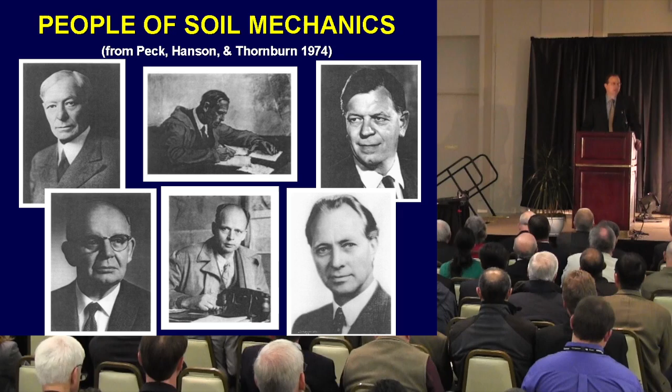So the outline of my talk: I'm going to describe the problem, and then, since the Peck Award mentions primarily the work done in Turkey after the Kocaeli earthquake in 1999, I'm going to go back and reflect on the field observations. I didn't know I was going to do research in this area—it was the earthquake that told me I needed to.

After the field observations, we moved into cyclic testing and centrifuge testing to get better insight, and did some analysis. Unfortunately, we continue to struggle with the challenge of earthquake engineering, and I actually just flew in from New Zealand, where I'm spending my sabbatical, because the centrifuge tests I was modeling at UC Davis are actually happening at full scale multiple times during the Canterbury earthquake sequence. So I'll talk a little about that, and then be bold enough to finish with some recommendations.

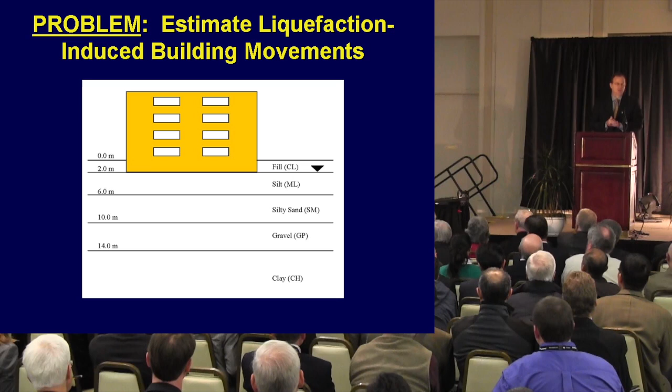The problem can be simply stated: all you have to do is estimate liquefaction-induced building movements.

What most people do is apply the techniques that are available. What's largely available are methods for estimating free field settlement of level ground. Many of these are based on the great laboratory testing of clean sands by Ishihara and Yoshimine in 1992.

In this simple case, you could calculate the factor of safety against triggering of liquefaction and estimate the relative density. Then each layer would have a volumetric strain; multiply it by the thickness of that layer, sum that up, and you can estimate your settlement.

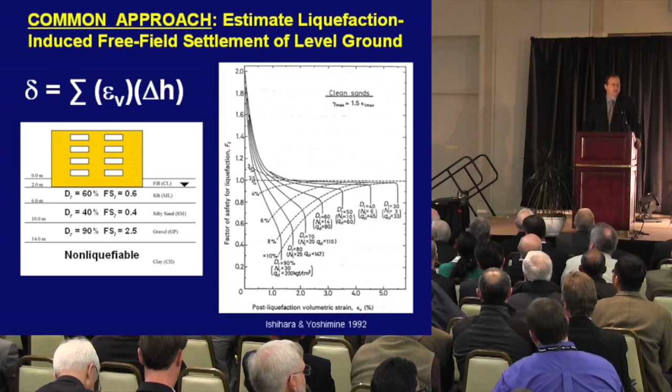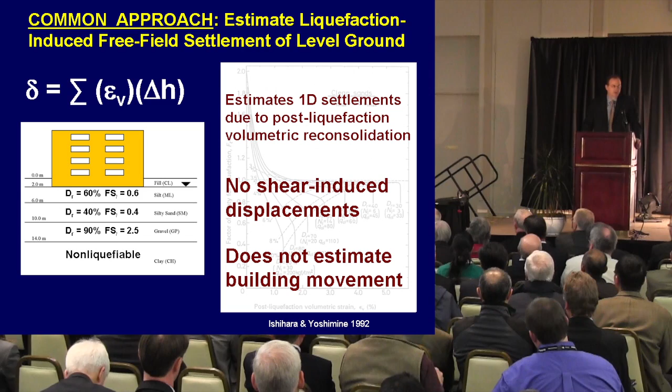Unfortunately, this is due to post-liquefaction volumetric reconsolidation. So it's good for the free field where that mechanism holds. There's no shear-induced displacements. It does not estimate building movements where the building is imposing shear in the liquefied material.

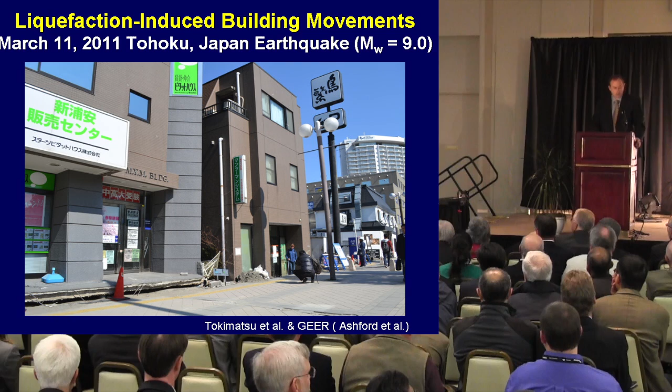There's been great work on this by Professor Tokimatsu, Professor Dobry, and others, looking at case histories and some centrifuge tests with thick deposits. These case histories always had thick deposits of sand, and so they developed this normalization, such as settlement of the building normalized by the liquefied layer thickness. That normalization suggests it's volumetric strain — if you double the thickness of the liquefiable layer, you double the settlement.

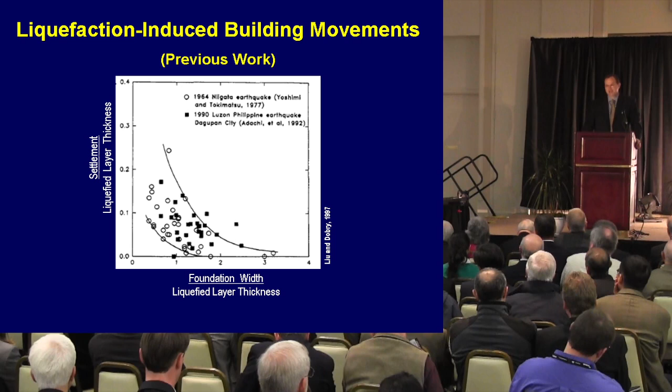That's not true when you have thin layers and you have shear-based movement. I'll show you that later.

Liquefaction has occurred for many years and centuries. We have the 1906 earthquake, and no one forgets their first sand boil. In fact, Ross Boulanger and I were out there on the approach to I-880 after the Loma Prieta earthquake, and that's my first sand boil that I've ever seen.

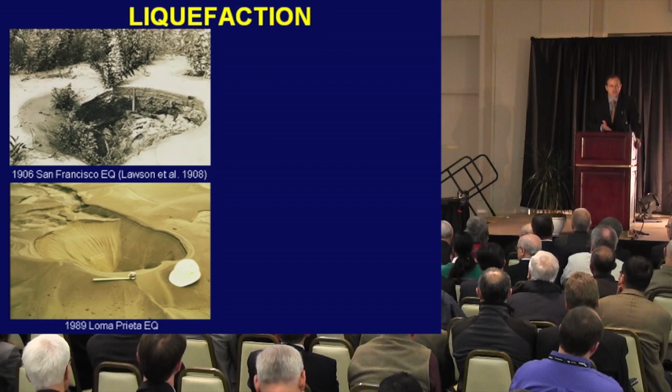That's the obvious consequence that we've had liquefaction — sand boils, injecta. Part of the controversy is liquefaction triggering, whether you call it cyclic mobility, cyclic softening, cyclic failure, liquefaction, or flow liquefaction. I think we can jump past some of those controversies if we focus on effects of liquefaction.

Because in a sense, there's a material beneath the building that has undergone some kind of transformation, and it has a stress-strain response, and there's a strain deformation field, and then the buildings tip over or a bridge undergoes a lateral spread.

In fact, I can show you a lot of details in terms of pore pressure generation and effective stresses and QP plots and things like that. But as a practicing engineer, what you might be worried about, most importantly, is deformation.

So I think it's very important to distinguish flow liquefaction — that's the terminology I'll use today — where, because of pore pressure generation, you have the buildup of pore pressures, but you really don't see that in the strains. The strains are slowly increasing, and then boom, you get that large strain potential. That's something we should be very wary of, and it should be a major concern in terms of stability of slopes as well as buildings.

If you take a dense sand, medium dense sand, or a silty sand with angular particles, you can generate contractive behavior and get pore pressures, and the effective stress goes down. It can soften, but the minute it starts to soften, it strains and it dilates and arrests that movement. That's a very different type of soil response — that's what you see in terms of cyclic mobility with strain hardening.

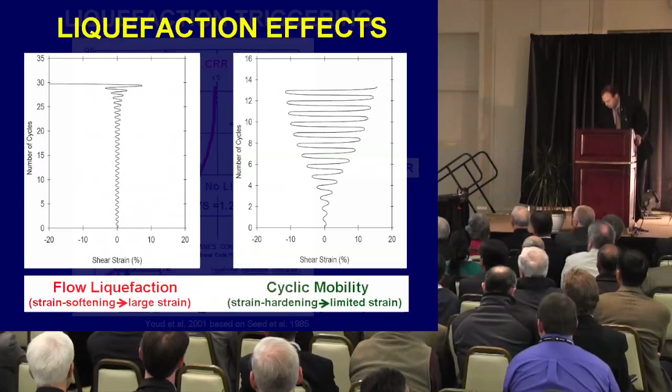One of the plots, based on case histories by the late Professor Harry Seed, and then adopted by the Youd et al. state-of-the-art paper, is liquefaction triggering, where, depending on the seismic demand — the cyclic stress ratio on the y-axis — and some kind of penetration resistance, you can say, do I have a demand with a soft enough or loose enough soil where I have liquefaction, or do I have no liquefaction? The factor of safety is the resistance over the demand. A factor of safety of 1.2 does not mean the same thing across that space.

Because on the left, when I have low blow counts, factor of safety 1.2 says, okay, I've got a capacity that's 20% greater than my demand. Same thing on the right side. But this is a better way of looking at it.

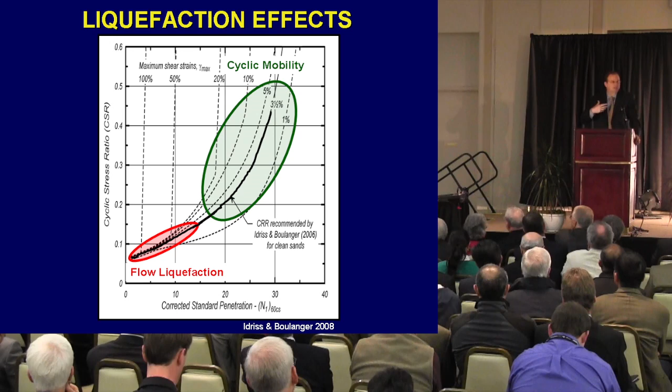When you're in the cyclic mobility regime, when you're in the larger blow count range, yes, you can have liquefaction, but it's a more systematic buildup of strain. It's incremental strain. It may eventually lead to strain that's too much in terms of satisfactory performance, but you're unlikely to get the flow liquefaction that leads to the tremendous dramatic problems.

Now looking at the Adapazari earthquake, I call this the dynamic version of the Leaning Tower of Pisa, because at the depth of 4.5 meters, all the way down to 9 meters, and below that is some good material as well, is a dense gravel. The water table is at 1.5 meters, so they stopped the shallow foundation at 1.5 meters. If they had just taken the basement level down to that dense gravel, if they had put drilled piers or piles into that dense gravel, this would not have happened.

But remember, here we only had about 2.5 meters of liquefied material to cause that disaster.

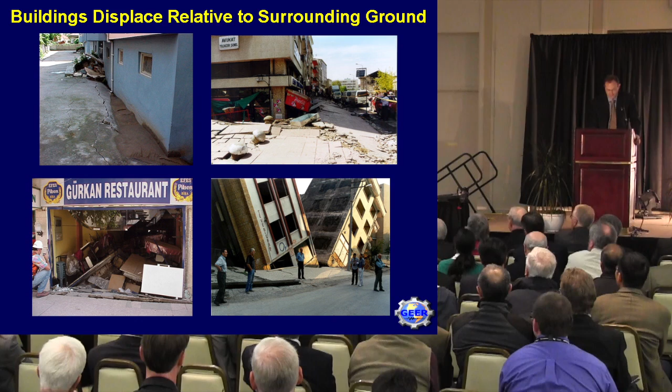We saw a number of things. The GEER team looked at soils punching in where we didn't look to see that there was much shear. There was just a kind of volumetric punch down. We did see cases on the right and the top where you see some heave of the building. That floating foundation in the bottom left became a floating foundation when the heavy walls punched down and the liquefied material squeezed up. And then we have, of course, the V is not for victory building response.

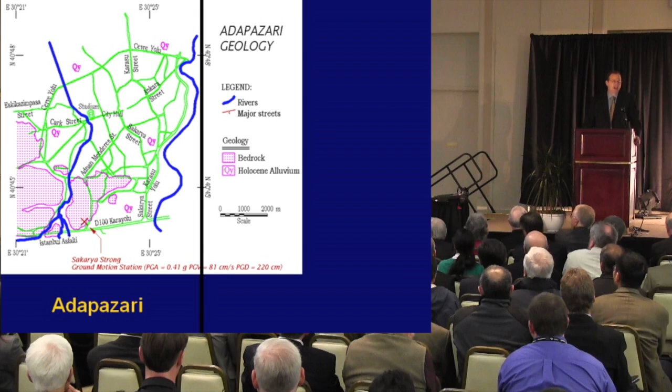Adapazari means island market. These two rivers were constantly meandering across this area. In fact, a bridge built by the Romans 1,500 years ago is now several kilometers west of the current alignment of the Sakarya River. This place, even up until the 1950s, before they put dams in, had overbank deposits and floods every other year. So many of the soils in the downtown area are only 50 to maybe 200, 500 years old.

What's interesting is to look at the damage statistics, and the bottom southwest part of the city is rock. The classic case is where the blue colors are less damaged. There are some poorly built buildings in Adapazari, and they did get damaged from shaking, but the normal thing that geotechs are used to: soil's bad, rock is good. The rock sites didn't have as much damage.

What's interesting when you look at the soil is the fact that there were some areas where the buildings that heavily damaged or collapsed, so we're talking significant structural damage, there were areas where almost 50% of the buildings in that district were damaged by liquefaction and ground shaking. And there were other places just adjacent to that where it was only 15 to 30%. So the idea is just to dig into there and understand why the variation across that area.

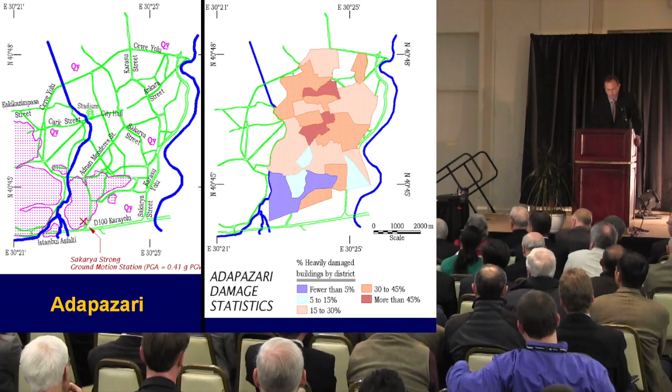Part of that is so important, to get there after the earthquake and do detailed studies. This is part of that GEER study. A number of people were involved in that, and Jonathan Stewart and I collected it together in this report.

But this is just showing you 60 structures along one line, where building by building, in a consistent way, we collect data on whether there was ground failure. 0 means there wasn't. 1 is minor ground failure. 3 would be tilt of 3 degrees, settlements more than 25 centimeters, significant ejecta. Same thing with the structural damage index: 0 is no damage, 1 is architectural damage, 2 is actual cracking of structural members, 3 is permanent offset, and 4 or 5 is partial collapse and collapse.

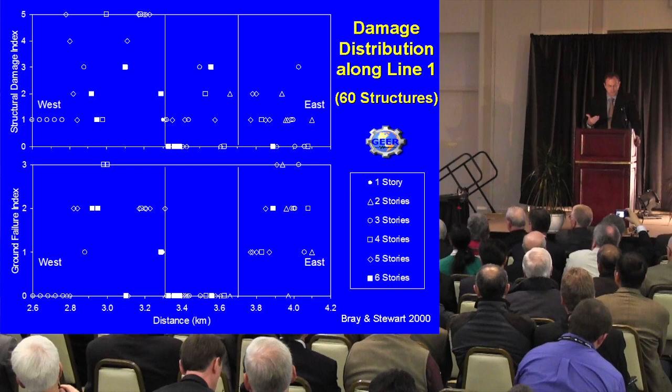One of the things you see is variation as you walk along this line. There's some significant ground failure and correspondingly significant building damage. There's no ground failure in other spots, but there's still some building damage, not as much, but badly built buildings structurally will still have problems even without liquefaction. And then there's more ground failure further along.

That required an extensive study, so the NSF sponsored a study by Les Youd and myself to go out there and investigate. Back in the summer of 2000, a year later, we performed many cones. We always start with cones because we get a sense of what's there.

It's a continuous reading, so for example, when we're looking at these silts of low plasticity, I can look at the friction ratio, I can look at the tip resistance, and I can say, okay, that's an area where I want to grab a sample.

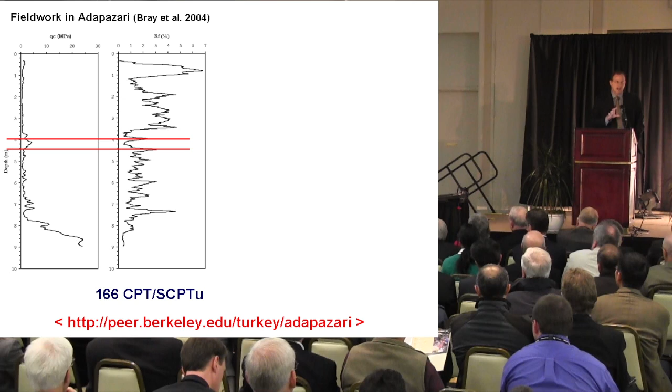Then we follow on with borings and SPT. At that time, 15 years ago, we didn't have the same level of confidence in the CPT as we have now. That ratio was about 3-to-1. Nowadays, I would do 6 cones for every boring, and there have been projects where I've done no borings, because there's actually a CPT device that can collect samples. So all you need is a CPT device to do some of the work in terms of liquefaction if you've got sandy or clean soils. In fact, in New Zealand, where it's largely sandy soils, I'm primarily just using the cone.

But you can see that the sampling is done deliberately to grab that sample. When I do peer review, one of the first things I do is look at boring logs, and if I see 2.5 feet, 2.5 feet, 5, 5, 5, 10, 10, 10, I know the engineer is not thinking. You can always use geophysical techniques, CPT, or adjacent properties to look at what's there, and you should have an idea of what's there, what could be important, and then grab samples at the key elevations.

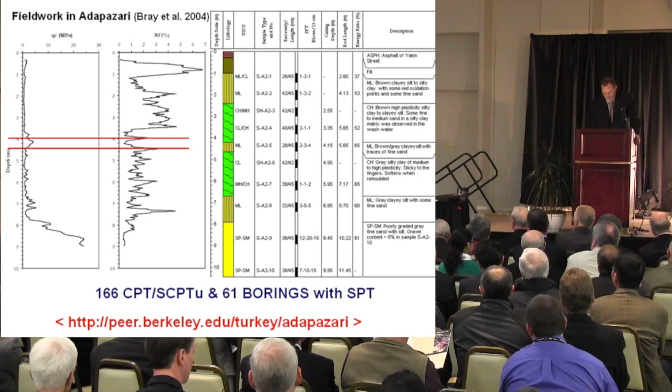If the SPT blow count matters to you — if it doesn't matter to you, don't do it. But if it matters to you, you have to measure the energy.

I was very excited about this site because I was told the blow counts were 15 to 25 in Adapazari. That's right on the line. We know when we talk about liquefaction triggering, we want case histories that are right on the line. The ones that are far in or far away don't really matter as much.

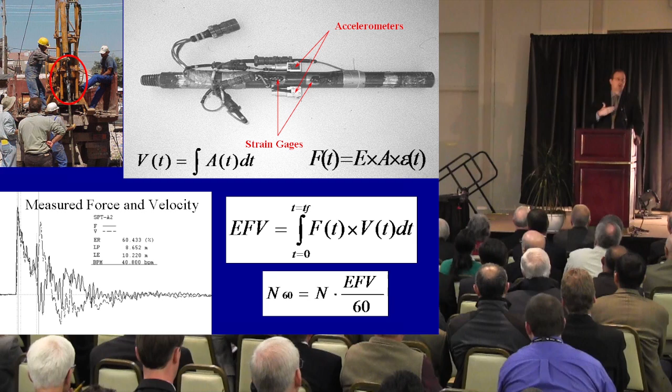When we actually measured the energy, the first time they did this, we got 80% energy, 30% energy. But when we trained them and said, look at this box, see that number? I want 60 on that number. Then they were trained, and all of a sudden we got blow counts from 4 to 10. So you have to measure energy.

The other thing we found is, for example, the short-rod correction that we use in all fields — that worked for softer soils that had lower blow counts, but for the soils in Adapazari, there was no reason to use a short-rod correction when the blow counts were 10 or greater.

The other thing you can see is the standard deviation of the measurements. We're doing a very good job of getting that energy measurement around 60%, and that's what we want. So even a trip hammer that's been automated and gets 80% energy, I would maintain that that's wrong. Calibrate it to get 60% energy, because clearly the energy correction ratio is not a linear issue.

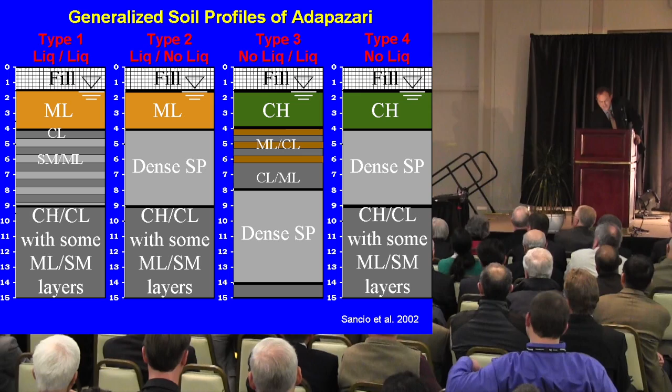When we finished this investigation, we could classify soils in Adapazari under 4 different types: some liquefiable silt on top of potentially liquefiable but slightly older silting materials; silt over dense sand that would not liquefy under the ground shaking we saw; clay soils on top of liquefiable soils; and clay soils on top of dense soils that should not have liquefied. Now with that information, we can go back to this mystery, and the mystery is no longer a mystery.

We see that our techniques are actually very legitimate. Where there's no liquefaction estimated, there was no observed liquefaction. Where we had liquefaction estimated with our techniques, then we ended up basically seeing the liquefaction.

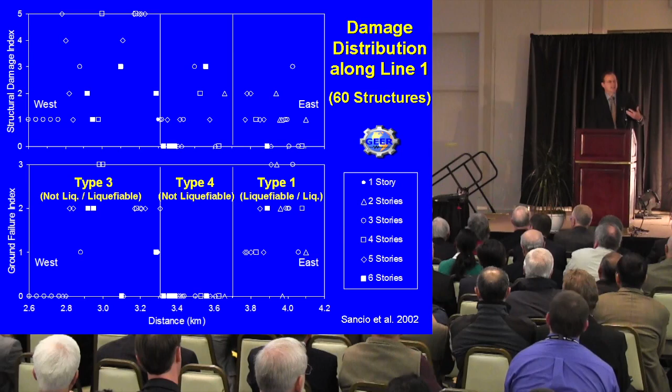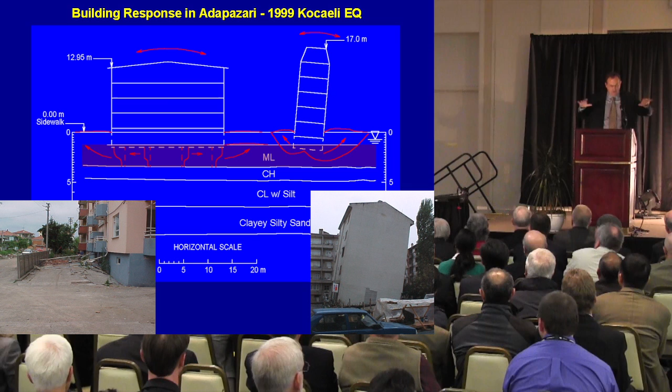It's critical to take an empirically based method like liquefaction triggering and use case histories to recalibrate and prove the accuracy and understanding. One of the things we saw from Adapazari that was very different from other earthquakes is this was not a case of deep sand liquefaction. This was a case of shallow layers of low plasticity silt softening, cyclic failing, liquefying, or cyclic mobility issues, where buildings basically squished into the material, material got pushed out, we saw some heave of the ground, and buildings underwent partial bearing capacity failures.

A classic case is this tale of three buildings. One of the buildings was actually taken down by the time we got there the following summer. The other building, C2, had significant damage, and they were wondering what to do with it. The owners of building C3 had no problems. These are exactly the same buildings, built by the same contractor, the same structural engineer. Just to add a little spice, the middle building has a black roof, but other than that they're exactly the same - black tile instead of tan tile.

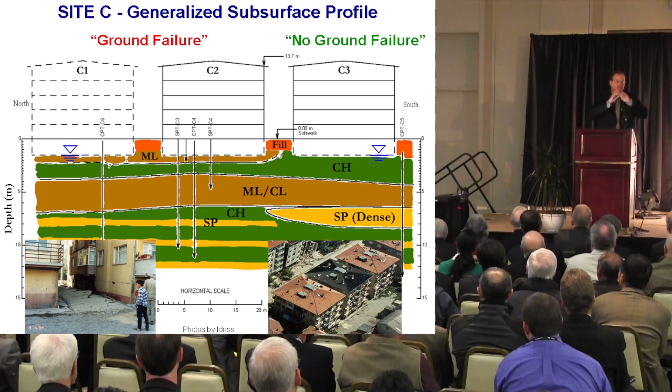But major liquefaction caused movements of 25 centimeters of settlement - buildings actually slid on liquefied material about 10 to 20 centimeters. The difference is largely due to that thin, 1 meter thick liquefiable soil right beneath the foundation. If you take your volumetric strain calculations, you will not estimate 25 centimeters of settlement with just a meter of soil liquefying. It's clearly squeezing out - this is more of a shear-based failure.

I said our techniques worked - they worked to a point, because early on we realized the Chinese criteria, recommended in the Youd et al. paper which was the state-of-the-art at the time, didn't work. It worked in terms of liquid limit - materials that tended to liquefy, that had ejecta and these kinds of problems, had low liquid limits and high water contents. But the one area they failed miserably is the percent finer than 5 microns. The criteria says the materials you have to worry about, besides having low liquid limit and high water content, have to have less than 15% of the material less than 5 microns.

The actual material that liquefied has got more than that. So if you had applied the Chinese criteria rigorously, you'd have said this material would not cyclic soften, fail, or liquefy. This really brought me back to Casagrande in 1937 - he basically said be wary of applying grain size to fine-grained materials. That's the reason for a plasticity chart, to get a sense of mineralogy. It's not the size of the particles that matters, it's the mineralogy of the particles. If you have an incredibly fine silt made of quartz that just happens to pass through the 5 micron in a hydrometer test, it still acts like a quartz particle. So we don't need to be doing hydrometer analysis, at least when it comes to liquefaction assessments.

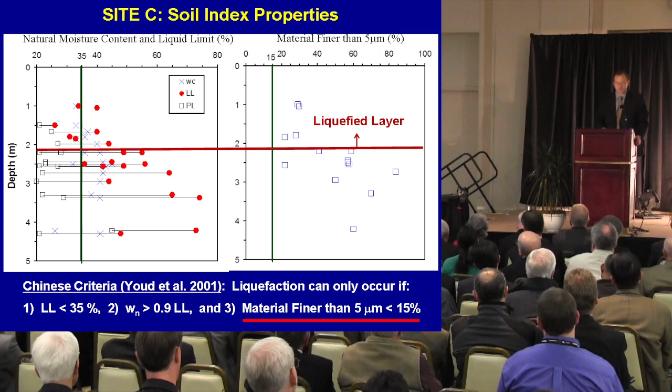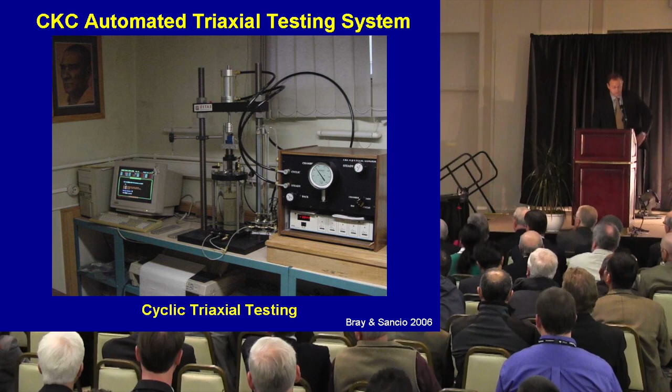We wanted to bring these soils to Berkeley, but we couldn't, not without significant disturbance. A flight from Istanbul to Berkeley, I thought, would have been too damaging. So we brought Berkeley to Turkey. This is a CKC device developed by Clarence Chan at Berkeley - you can see it's in Turkey because we have the Ataturk poster shown in the picture. Zetas is the owner of this; they set up the lab, and we did cyclic testing. After Mike Riemer came over and tested it all out, Rodolfo Sancio was then conducting laboratory tests in Turkey.

We started off with one sampling device, and it didn't work that well. I remember what Demetrious Koutsoftas told me when I practiced at Dames & Moore: you'll never find a better standard sampler than the Dames & Moore hydraulic piston sampler. I bought one of those. I found out Dimitri has one in his garage, so I decided if he's fanatical about it, so will I be. I bought one and brought it over to Turkey. There are Laval samplers, gel pushers, some very expensive elaborate samplers, but in terms of standard samplers, there's not a better sampler for silty soils and clayey soils than the Dames & Moore hydraulic piston sampler.

It uses a brass tube. It only shoots 45 centimeters instead of 90 centimeters, so it doesn't get the pile plugging effect. It has a constant inside diameter.

It's incredibly thin. The bevel's on the outside. It's got this nice smooth push. It is the best sampler.

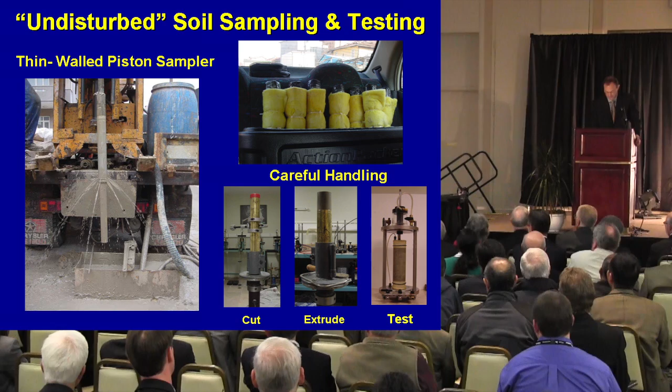And then once you take those samples, you basically, like your baby, you lock them in the back seat, all nice and with the blanket around them. But then you have to check that.

NGI has really primarily worked with clays and clay silts, but we're extending this to silty clays and clay silts to look at sample disturbance. We wanted to use the Bjerrum recompression technique, to bring it back to the in situ stress state.

If you monitor the change in void ratio to take the soil back to its in situ stress state, and look at that change in void ratio divided by the initial void ratio, you get an index of the quality of the sample. We did not test these samples unless they were very good to excellent in this range.

For the very clayey soils, we're getting a more stable response. Now, I thought I'd be able to really look at this and say, okay, PI 0 to 4 one way, 4 to 8 another way, and 8 to 12. That was actually in my NSF proposal.

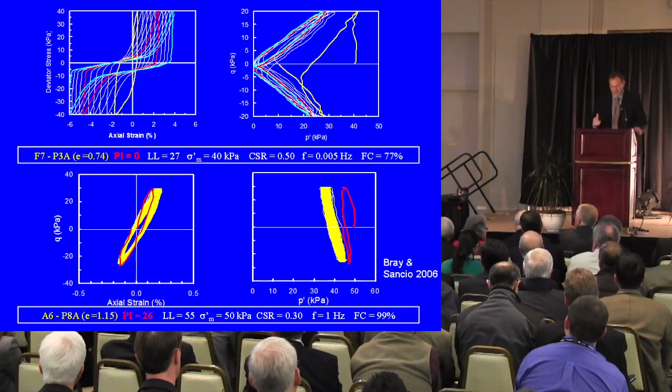When I actually did look at these tests, these are natural soil deposits. They try to be as homogeneous as possible, so we did Atterberg limits in the top, middle, and bottom of these specimens after the test to confirm they were somewhat homogeneous, but they're still somewhat heterogeneous. We got results where there's a tendency that as the PI increases, it's a bit more resistant.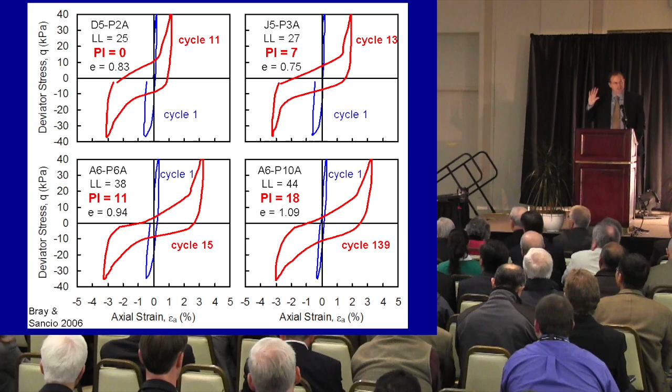I'm showing you the first cycle in blue, and then the cycle where we got the 3% axial strain, which we defined as failure, in red, and you can see the number of cycles. 11, 13, 15 is about the same for natural soils. It's not until the soils get very high PI in a relative sense that they become much more resistant.

Then we brought soil back. Now, obviously, we're bringing soil back to Berkeley. This is the work of Jennifer Donahue with Mike Riemer and myself. The idea is to go ahead and reconstitute specimens so they are homogeneous.

Whether the PI is 10 or 11, you get about the same results. But notice that PI of 5 and 7 are not much different, and very importantly, the PI of 2 - that red line is almost on top of the dotted line used for the PI of 10. When you get to the higher PIs, you start to get more of that clay-like behavior.

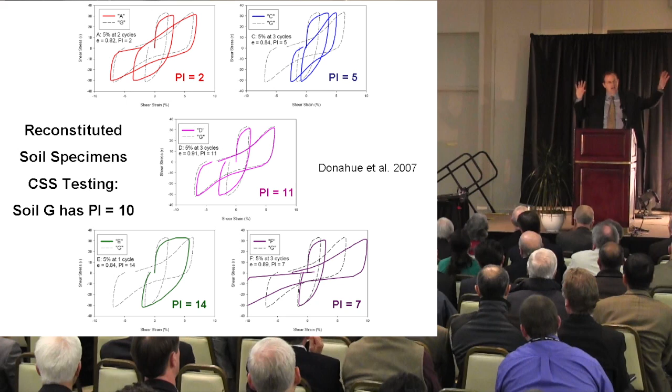So I'm of the firm opinion that there's sand, there's clay, and then there's mixtures. There's a silty clay mixture, and it's a gray zone. I don't think we're ever going to see things as black and white. I think we're going to basically have sands and clays, and then we need to look at this material differently.

Here's another case where samples have been made, and in fact the void ratios are nearly the same, and hence we picked them so the liquid limits were similar. So the only thing that varied was PI, hence the water content to liquid limit ratio is about the same.

As an engineer, I'd say those are the same line, but if you really want to get picky, the PI 2 line is actually a little bit higher than the PI 10 line. So again, whether we call this cyclic failure, cyclic softening, liquefaction, or cyclic mobility, we do have something where we're losing strength temporarily, and losing stiffness temporarily, and then it's dilating to resist that. The phenomenon is very much the same in terms of effects on structures.

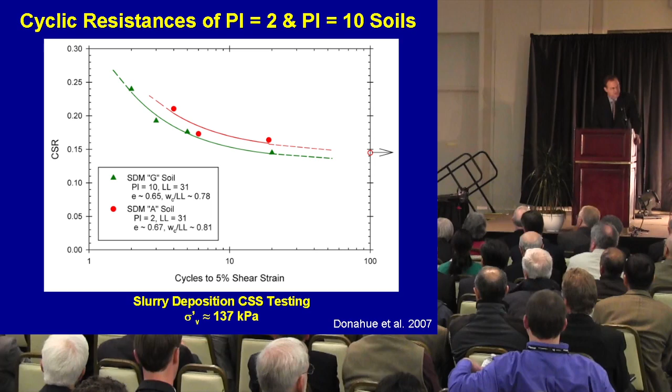This is our data from the cyclic test where we had liquefaction observed in terms of pore pressure generation close to 1, with RU equal to 1 near the initial vertical effective stress, or we had 3% single amplitude strain in these triaxial tests. Making the point again, I don't think anyone who works in this field now stands behind the Chinese criteria. I think that should be over.

Everyone should be using some other method, Idriss and Boulanger, Bray and Sancio, or other techniques to look at this. I'm obviously partial to Bray and Sancio. I think Rodolfo Sancio is a really smart guy. It works on this case history, and it's worked on a number of other materials. In fact, people are using it in Canada and other places as a liquefaction susceptibility criteria.

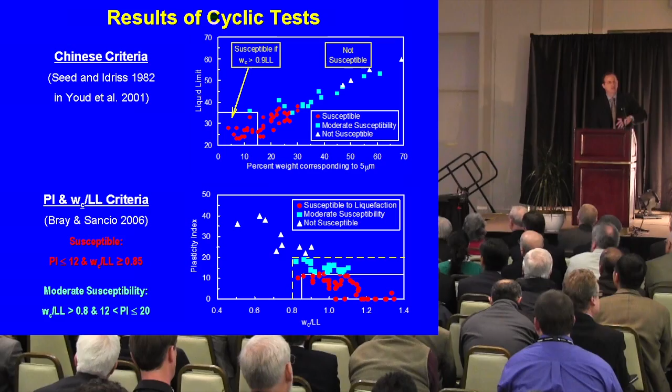And I say liquefaction, but again, it's really cyclic mobility. It's a transient state where you get some temporary softening.

I also want to talk about I sub C, because this is misused sometimes. I think Peter Robertson, who's in the audience, can talk to you about it in detail. I hope he agrees with me that he picked the names carefully. Sometimes we want to use short names, but I think soil behavior type index is an index of types of soil behavior. It is not fines content. It is not a unified soil classification system. It is an index of the type of soil behavior.

Unfortunately, a number of our techniques use fines content, or they want the traditional system, and there's mapping between those two. Well, it's going to be a bit rough. I've seen projects where people say I sub C is 2.59, it'll liquefy, I sub C is 2.61, it will not liquefy. We can all sit back and realize that doesn't make sense, and you need to really calibrate that on a project-by-project basis.

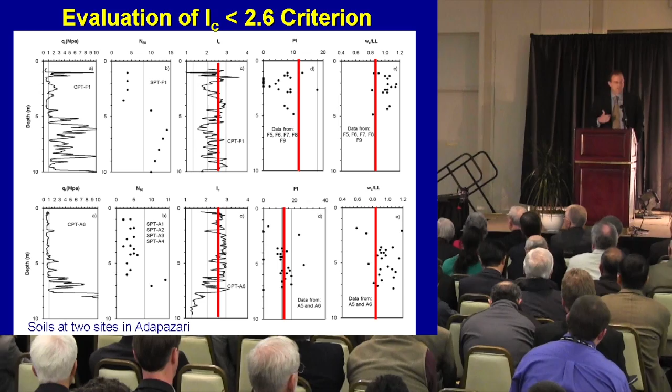In the upper site, that kind of works pretty well. When you have the low I sub C, you have the low PI materials, the high water content material, we had evidence of liquefaction at that site. But I can show you sites like the bottom site where the I sub C is largely above 2.6, but we still have some significant material with lower PI than 12, high water content, and we had a cyclic failure, cyclic mobility kind of response where a building settled about 1.5 meters versus 10 centimeters on its other side, so significant building tilt due to that phenomenon.

So, cyclic mobility susceptibility of fine-grained soils: the percent clay size criteria is unreliable. Do not use the Chinese criteria. Focus on soil mineralogy and sensitivity. I'm partial to checking PI less than or equal to 12 with a high water content.

But very importantly, and others will agree on this, the other problem with the name liquefaction is that liquefaction sounds bad, meaning if I don't have liquefaction, everything's good. That's not true, because if I have a sensitive clay that undergoes a fabric breakdown, we don't call it liquefaction in the textbooks, but it's a significant loss of strength that can lead to flow slides or tremendous damage to buildings.

So please do not make it liquefaction or no liquefaction, if liquefaction doesn't occur, I'm safe. You have to always look at whether there are materials that might lose strength from some phenomenon that might be disastrous in terms of the performance of my slope or my building.

And then the great thing here is the late Professor Harry Seed left the laboratory, which he loved in his early days of liquefaction testing, to go to the field because he had to. He couldn't get clean, loose sand deposits into the laboratory and test them effectively. We have freezing technologies now where we can do that, but they tend to be more expensive, so we stick with CPT and SPT. But these soils can be sampled effectively. They're silts with a little bit of clay, with PIs of 4, 7, and 10.

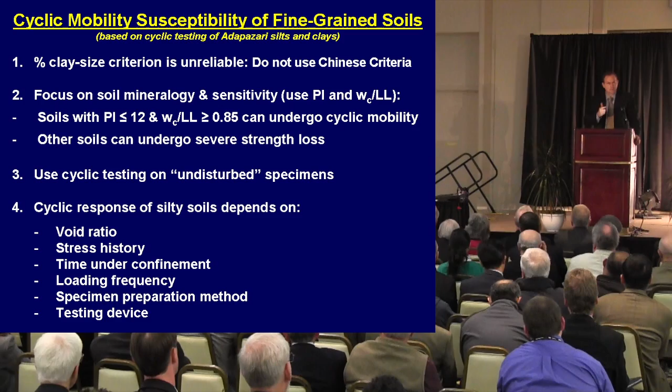We can sample these, and there's no excuse to not bring them into the lab after they've been sampled effectively and test them. Going back to the classic work of late Professor Harry Seed in '79, where he did all that testing on clean sands, we've gone back with Donahue's work and looked at the effects of void ratio and stress history. Sampling will never be perfect, so you always have to think about how you've changed the stress history, or the time under confinement before testing. In fact, stress history and time under confinement are more critical for slightly plastic silt materials than they are for clean sands.

Adapazari was a great lesson in understanding liquefaction and its effects on structures, but we were really restricted with these case histories because we had only one component of one ground motion recorded for that event. There's really nothing more important than the input ground motion, and we had just one component, and it was 3 to 4 kilometers away from the heart of the city where we were doing most of our work. Since nature's not going to provide us instrumented case histories with pore pressure sensors in the soil beneath buildings before an earthquake hits, we can make little earthquakes up at UC Davis on the centrifuge.

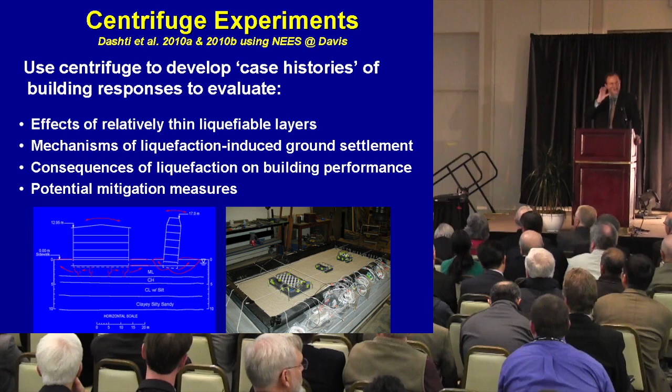So we can start looking at the effects of thin layers. One of the things unique to this testing is that we used relatively thin layers of liquefied material. We started off with 6 meter thickness. I'll do everything in prototype scale because that's how engineers think. You divide these by 55 and you get what we actually had as dimensions in the centrifuge, and we spun it up to 55 Gs.

We had 6 meters initially because that was the thicker layer, so we could see how our results compared with others. But then we went to 3 meters with the idea of: can 3 meters of liquefied material have about the same consequences in terms of deformations? Let me show you this video real quickly.

We focused - there's always a struggle on instrumentation, you know, what should you have - but we decided to focus on displacement. So we had displacement LVDTs at each corner.

One of the first things I had been taught was that liquefaction is an undrained phenomenon - everything is constant volume, and then we get post-liquefaction reconsolidation and drainage. That's not what we saw in the centrifuge. I'm a little worried about this because the centrifuge sometimes doesn't capture all the mechanisms, but we went back and looked at interviews of people in Turkey, and they talked about when they exited the building, much of the settlement had already happened. So settlement is occurring during strong shaking. It's not undrained then drained - it's response with some drainage occurring during strong shaking.

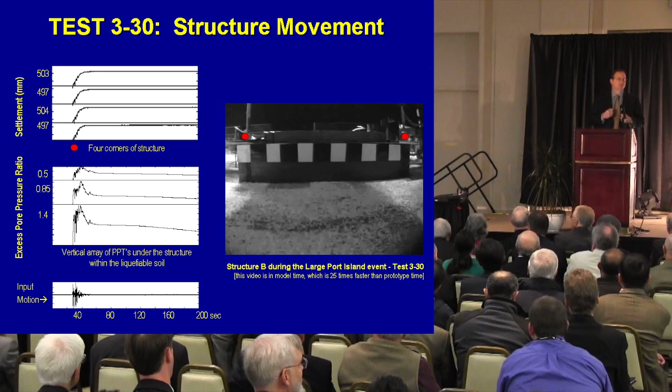This is the 3-meter thickness test. We looked at both 50% relative density and 30% relative density. The time history is shown on the bottom, with pore pressure generation on the next plot up. You can see we got an RU of 1.0 for the 30% relative density material. Very importantly, you don't have to get full pore pressure generation - we didn't get that for the 50% relative density material, but you still get enough softening to produce about the same amount of settlement. We tended to get less settlement at 50% relative density than at 30%, but the most important thing is the significant amount of settlement occurring during strong shaking.

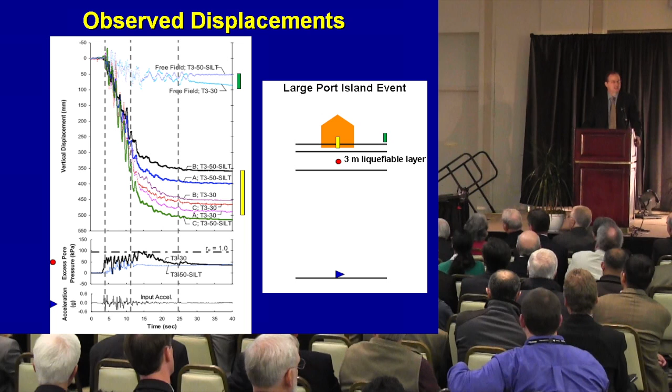Then after strong shaking, the pore pressures exit, the high water pressure dissipates, and the stress is retransferred to the soil skeleton. Now you're getting the familiar shape of a consolidation curve. If you're looking at it in arithmetic time, it looks different, but if I change it to log time, it would look more familiar to you.

And the settlement of the building is significantly more than the free field. So like we saw in Japan, the buildings are settling into the free field. The free field is settling, but it's the buildings settling into the free field.

Another important thing is looking at water pressure under the building and away in the free field. Because of the building and the extra stress, you have a higher capacity to develop higher excess pore pressures under the building, and so you have hydraulic head going from underneath the building away. As soon as you have these high hydraulic gradients, Darcy's law acts, and water's leaving from underneath the soil, so the sand can settle down a little bit.

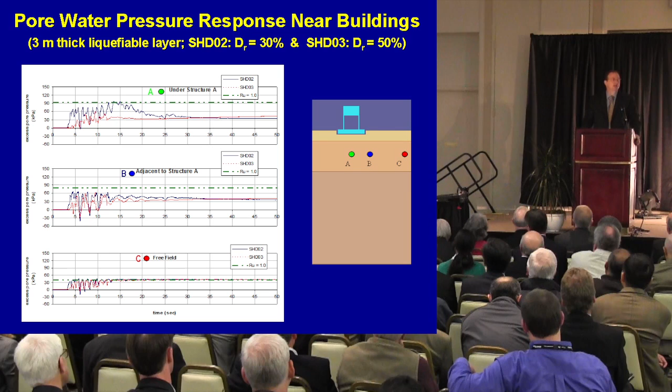So this leads us to mechanism. One of the most valuable things about centrifuge testing is you control it. I know what the time histories are, I measure the time histories, I know the thickness of the layer, I know the relative density. You can really look at and focus on mechanisms.

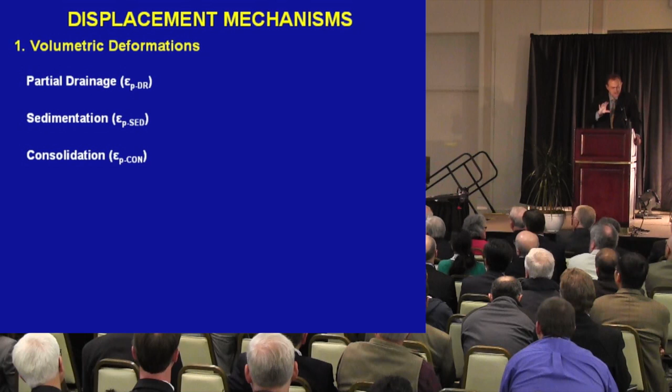I like to break things down into volumetric and shear mechanisms. For volumetric, there are a number of mechanisms, but I listed the three most important. First, we are getting partial drainage. Water is moving, and when you have a high transient hydraulic head, water responds to that. You have water moving from underneath the building, and that leads to local volumetric strains.

If you get a high RU, a high excess pore pressure divided by the initial vertical effective stress, and you get liquefaction, you get a destructuring of the soil and it resediments, which leads to a lot of deformation. If you don't have that, you don't get that phenomenon. That's obviously something we don't model well with our constitutive models.

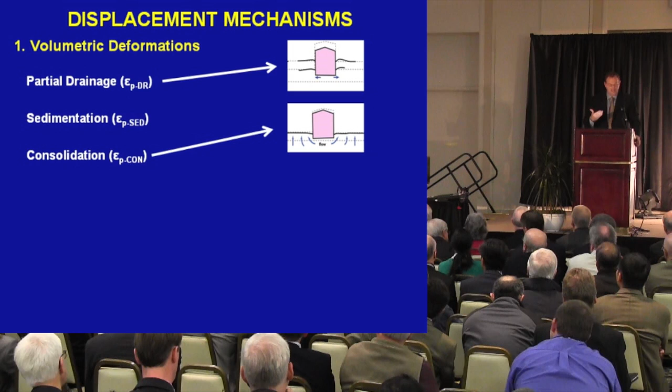Then we have post-liquefaction reconsolidation. During the earthquake, water is being generated probably faster than it can dissipate. Eventually the strong shaking starts to subside and water leaves at a higher rate than it's being generated. So you get transfer of water and the stress being transferred to the soil skeleton. But as you saw in those time plots, that's a much smaller part of the total settlement of the building. Most of the settlement occurs during strong shaking, when that's not as important.

The shear-induced deformations: if you could base isolate a building from rocking and shaking, and the soil generates pore pressure and softens, then it's less stiff. If you had put a CPT in right in the middle of that earthquake and used the Schmertmann method, you would have said that building's going to settle 20, 30 centimeters. That kind of phenomenon is basically a partial bearing failure. And if the driving stress exceeds the residual strength, you can get these bearing capacity failures.

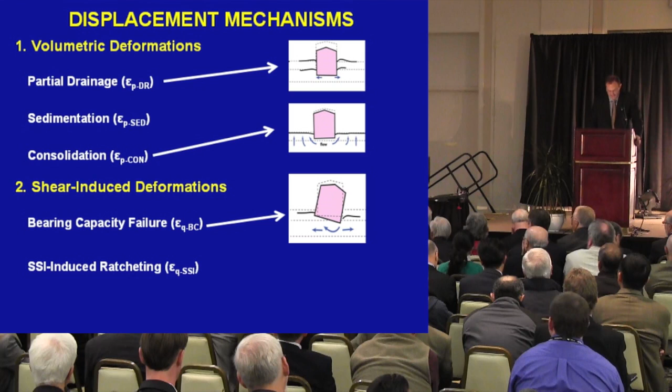But probably the most insidious mechanism is SSI-induced ratcheting. Because the building's pulling up on the soil, and soils don't like tension, right before it pulls up and disturbs it the most, it comes back and hits it like a hammer, and it works itself down into the soil.

On the BART system, which I was a peer reviewer of, Fugro did a lot of phenomenal analysis and some centrifuge tests with Bruce Kutter at Davis. The tunnel was lighter, so it actually ratcheted itself up. It's not an instantaneous deformation, it's basically a ratcheting of the building working itself into the softened material as it undergoes these transient states of low stiffness, low strength.

And then something I did not see in the centrifuge, and did not see in a lot of case histories before New Zealand—I can't forget the obvious: ground loss due to ejecta. If you've got half a meter of sand on the surface of the earth after an earthquake, that came from somewhere. If that sand came from underneath your foundation, you've mined out soil underneath your foundation. That has obviously disastrous effects. I haven't quite developed a constitutive model to handle that yet.

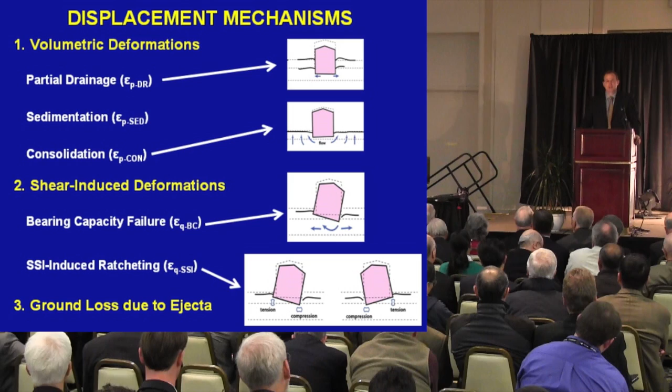That coincided with tests that Elizabeth Hausler had done with Nick Sitar, some work by Ricardo Dobry, where they had a thicker layer of liquefiable material. It matches the case histories. But just because the normalization works for a certain set doesn't mean it's fundamental. We have to be wary of normalizations that are not fundamental.

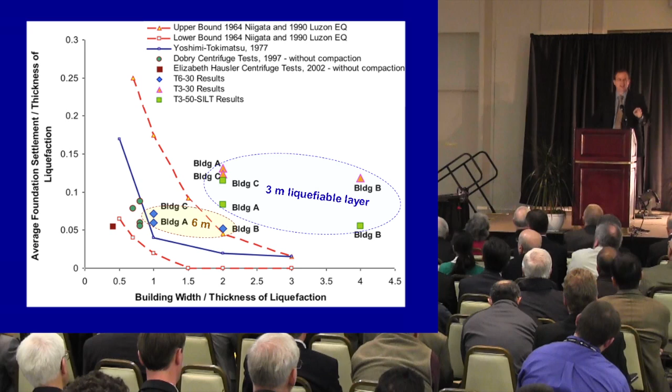The other thing I noticed when we looked at the black lines, which are the settlement, they looked a lot like something I'd seen in terms of ground motions. There's something called an Arias intensity plot, which you call the Husid plot, but Arias intensity is the integration of the acceleration squared. You can go back to Arias' paper in 1970 or go to Kramer's textbook and see that, but it's essentially telling you the energy that's being delivered to the soil.

What you see here is when you have a rapid rate of energy being introduced to the soil, you have a rapid rate of building settlement. In the TCU motion, which we deliberately chose because it has a slower rate of movement, you can see that the building is basically settling at a slower rate.

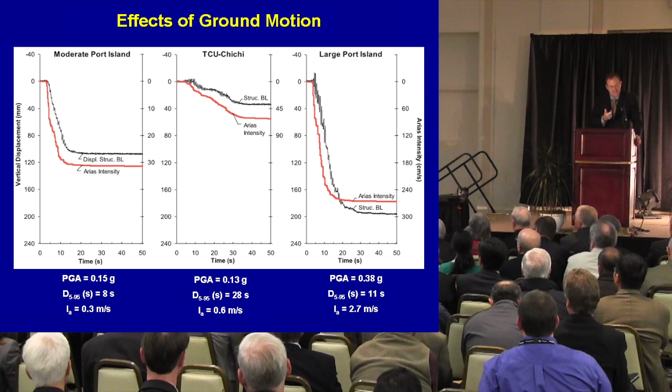And so this gave me a great opportunity to thank those professors that introduced me to Ralph Peck back at West Point. And so I came up with, yes sir, what you need is another intensity rate, is shaking intensity rate. It's essentially the amount of energy that's being put into the soil during significant ground shaking, which is the duration from 5 to 75 on the Arias intensity plot.

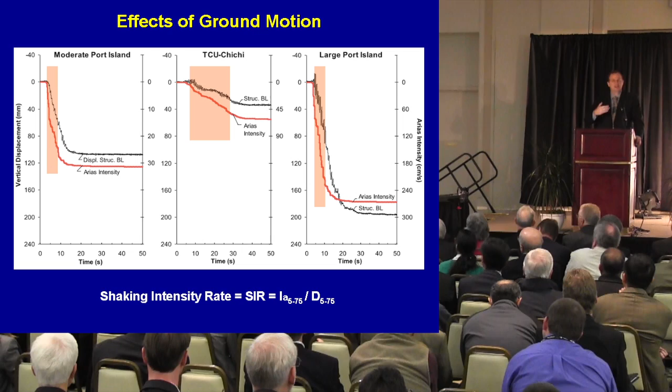When you have a high rate of shaking intensity, you get a high rate of building settlement. And so I think cyclic stress ratio and magnitude doesn't quite fit in terms of, or capture, some of the things that we're looking at here.

With the fourth centrifuge, it was actually Shideh's idea to say, let's not do what you wanted to do and what you wrote in the proposal. I've learned something, hopefully you've learned something. Let's challenge ourselves and really see if these mechanisms that we've identified from the first 3 tests are what we think they are in terms of their relative importance.

It will also give us a sense in terms of a positive aspect, how to mitigate these measures. So we used 3 identical buildings, shown on the right-hand side there. The middle was a baseline case, nothing different than what we had done.

But on the upper left, you see a structural wall. That structural wall is not tied to the building, it's just around the soil. There's a little bit of a gap. So the idea is we're not turning this into a deep foundation, but we are putting a wall that's not allowing water to go from underneath the building to outside, and it's not allowing shear-induced deformation.

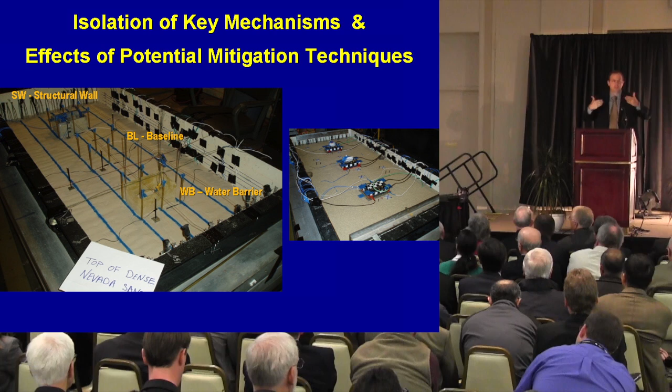As an alternative is the water barrier. It's a flexible membrane that won't allow water to go from underneath the building to outside, but it's flexible, so it will allow the shear-induced deformation. So let's see if our concepts hold water as well as the wall does.

The blue line is the baseline case, shown in the upper right-hand corner. There was shear deformation, there was volumetric deformation, and we got about 110 millimeters of settlement for this moderate Port Island shake.

The water barrier is taking one of the mechanisms out. It's taking out that local water, the water that's higher pressure under the building trying to go out laterally, and so the settlement's reduced by about a quarter. The structural wall is taking out even more settlement, and in fact, I think it's more than it would have been.

If you look carefully in the right bottom corner, you can see the sand's pushed up a little bit - our little plug, because we wanted to make sure the building wasn't touching the structural wall. Actually, the water pressures were so high they couldn't escape, so they found a way of escaping and shot up along the side of our foundation. Part of that settlement is because of the release of water.

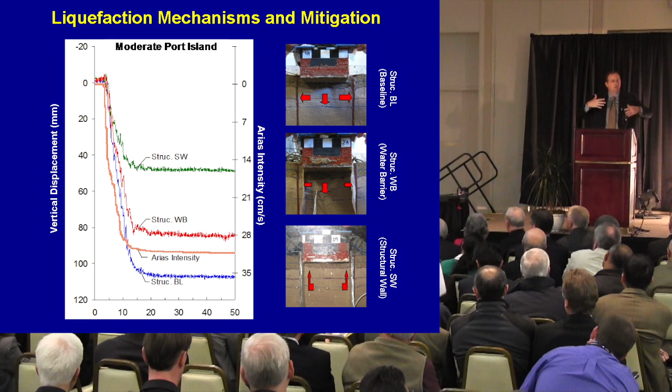But even with that, by not allowing the water to move until that plug failed, and not allowing the shear-induced deformation, we got about half the settlement. So these mechanisms are a good way of thinking about how pore pressures develop, how they move, and how the soil can shear in response to an earthquake.

Working with Peter Byrne, Shideh Dashti and I did some FLAC analysis. We picked the UBC sand model because it's well calibrated for looking at shear-based deformations. In fact, it was developed to look at dams. This is a case where we're looking at shear-based deformation under a building, but it does a very good job of doing a lot of things in terms of pore pressure generation and such.

I'm showing you its capability to capture the strain, because in the end it's the deformation that's leading to the settlement. The nice thing about a constitutive model, if it's calibrated, is you can look at details. In this case, the shear strain was a significant deformation of this building as it underwent partial bearing failure and SSI ratcheting. There was some volumetric strain underneath the building with the water moving out, but it was a smaller part of the entire picture. So shear-based deformations are key.

In terms of mitigating this, some kind of ground improvement would be focusing on the shear-based mechanism, but also you want to look at maybe partial drainage as well.

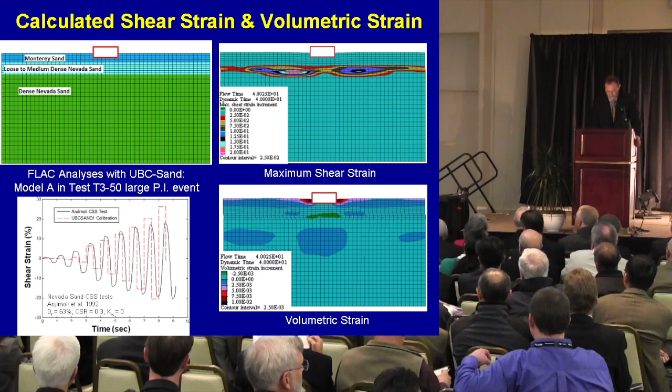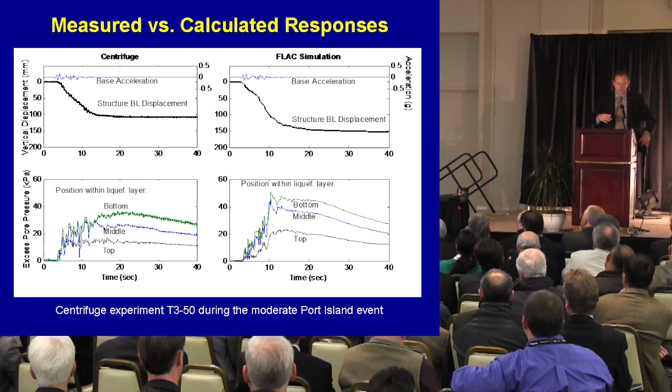We're not going to do much better than that in this field. It's a very difficult field. In fact, when we look at all of our analysis, with a calibrated model that's well understood, that it has its limitations, when we calculate large settlements, we tend to get large settlements. That's a classic thing that we have.

We see this in Youd et al. 2002, lateral spreading - we do a pretty good job of estimating settlements when we get a lot. If it's a big earthquake with massive liquefaction, our models work well. But we typically don't care whether a building settles 50 centimeters or 80 centimeters - that's too much. So where we need to work in performance-based engineering is on the bottom part of that plot. That's a bit humbling, because liquefaction is a brittle phenomenon.

Where we didn't do a good job, we predicted 100 to 150 millimeters of settlement, and there was only about 50 or 20 millimeters, because we're outside of these error bounds - we said the pore pressure was going to get up to maybe 0.7, we're going to get softening, and we get liquefaction and movements. The actual test, maybe because of the drainage we didn't get hydraulic conductivity right, the actual pore pressure generation was a little bit less. It didn't quite soften that much, so it didn't settle as much. We have to be wary that liquefaction is something we have to do a sensitivity analysis on.

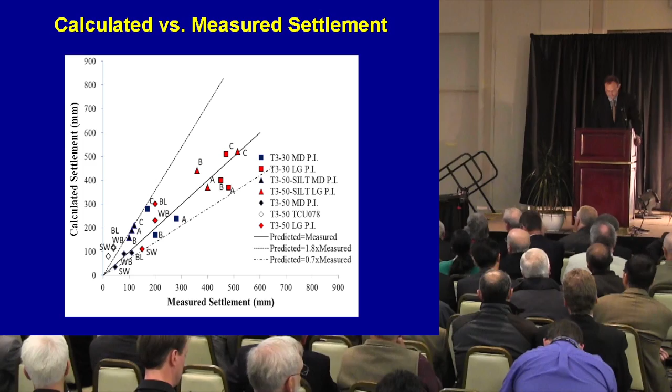The findings from this part: building settlements are not proportional to the thickness of the liquefiable layer. Free field settlements, yes, go ahead and use your volumetric strain procedures, but building movements are largely a result of shear strains and volumetric localized strains, and very importantly, as I'll show you soon, the loss of ground with ejecta. Building settlements are related to the shaking intensity rate and the relative density of the soil. These observations are important - they're not captured by available techniques.

Last is the Canterbury earthquake. Something that I had not done in previous studies is actually measure the amount of sand that came out of the ground. We noted that there was sand, a lot of sand, but I think that was a mistake not to measure the amount of sand and do this precise calculation.

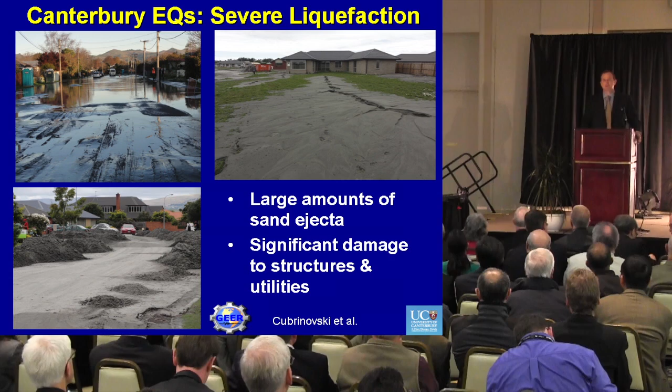There were places where there was 0.5 meter to 1 meter of sand ejected out of the ground, with disastrous consequences to the houses. What's remarkable about this is while I was doing something odd in terms of a centrifuge test.

A centrifuge test takes a lot to do, so we set that up, and we shake it a little bit, a little bit more, a little bit more. I mean, how many times are you going to have 3 or 4 earthquakes hit the same site? This place has been hit by 7 earthquakes greater than magnitude 5.5, dozens of others. Some sites have liquefied 5 times, some have never liquefied, some have liquefied 1 time, 2 times.

So the distance was short, so the intensity was high. Further away, only 30 kilometers away, magnitude 7.1 led to less liquefaction. I'm just showing you the severe liquefaction zones in white.

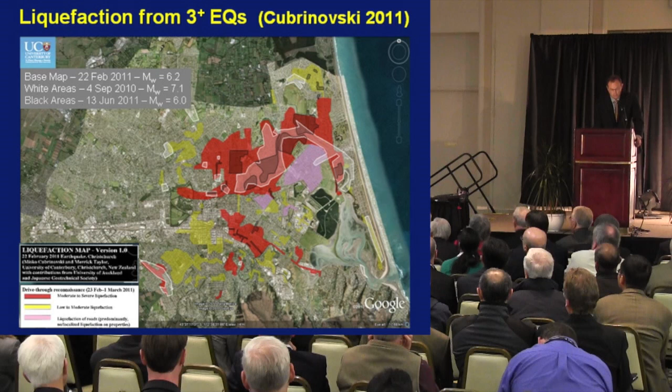And then I picked up on the June earthquake. They've had others — another 6.0 in December 2011 — it has a smaller patch. So this is really going to challenge our liquefaction evaluation techniques because we have full-scale case histories where we look at the same sites undergoing multiple levels of ground shaking.

Everything's very well recorded with dozens of strong motion sites. We have actually 8,000 cones put in the ground — 8,000 cones, an incredible database. Just focusing on the central business district, which is about a 1.5 by 2 kilometer rectangle in the middle of the city.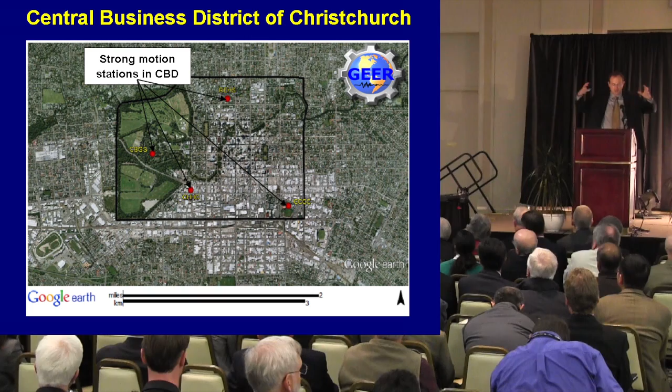Right to the right of Hagley Park, the green zone that you see, there's 4 strong motion stations around that area, and of course there are ones further out. So I'll focus in on those and just look at 5 of the important earthquakes.

The Darfield earthquake started off the 7.1, but it was further away. Then we had a 4.8 that was close, but there wasn't significant damage. The 6.2 was the big one in terms of the CBD — Darfield hit the outside areas pretty hard. And then 2 other magnitudes, 5.9 and 6.

This shows the recorded ground motions in terms of the median PGA of the 2 components. I used the magnitude scaling factor from Idriss and Boulanger, and estimated what the cyclic stress ratio would be right below the water table for shallow liquefaction. We can assume the ratio of total vertical stress to vertical effective stress is around 1, and R sub D is around 1, so you get that equation on the bottom.

The important thing here is look at the fine-tooth comb: at 0.07, there was no liquefaction observed in the CBD. When you get up to 0.09 to 0.1, we saw low levels of liquefaction in isolated locations in the Central Business District. And when it got up to 0.2, we saw severe liquefaction. So this is going to challenge our fine-tooth comb in terms of really testing our evaluation techniques as we try to perfect — we'll never do it — but we try to perfect our performance-based earthquake engineering.

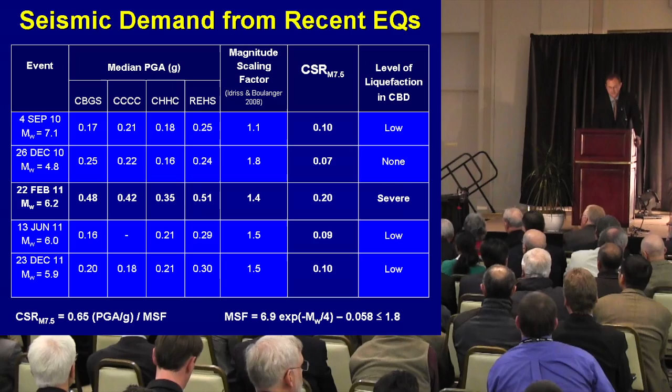We saw similar things: buildings sliding, tilting, settlement, individual spread footings. Unlike Turkey, which had massive foundations that moved as a rigid block, these had kinds of foundations that we use more in the US — individual spread footings put together with tie beams.

And so we measured angular distortion very precisely, and we saw cracking in the beam, which you can see clearly, which we should get at an angular distortion of 1/70.

We saw buildings where the ground settled away from pile-supported structures. And then we also saw something where we saw massive liquefaction but no settlement of the building, because everything kind of moved down together, since they were supported on gravel layers that were floating.

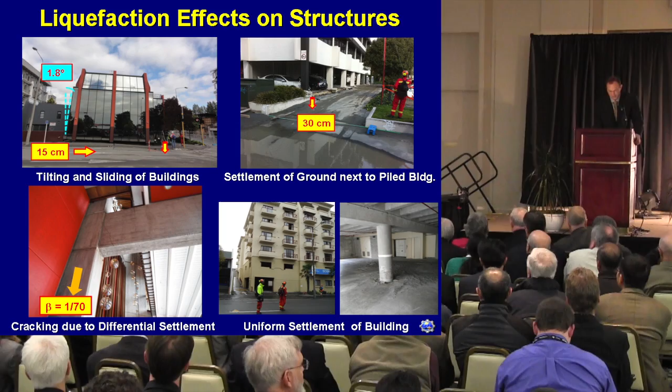Through the downtown area, we see the liquefaction through the CBD. And I want to focus on a site, just one site, that's right in this area.

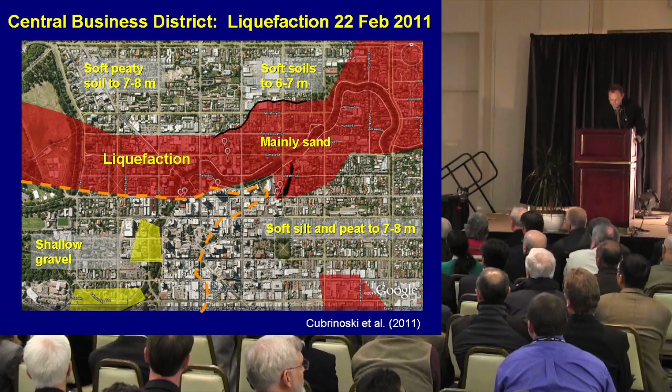Another interesting thing about Christchurch is it was just settled recently. Lyttelton was Christchurch in 1850, and they realized it was too small, so they went over the mountains, and like a good city, they decided to go ahead and build on the swamp.

Now, they were smart enough to put the cathedral on shallow gravel, so the cathedral actually had no liquefaction issues. Unfortunately, it was a brittle masonry building, so it had significant structural damage, but they were smart enough to avoid the liquefaction there.

But when you look at this map, you see that the Avon River, where it's channelized now, wasn't there all the time. In fact, this is a lot like Adapazari, a lot like Mississippi - a lot of these soils are overbank deposits, just deposited in the last 50 to 1,000 years. So they're relatively young soils. A lot of them are 100 to 500 years old in the upper couple meters.

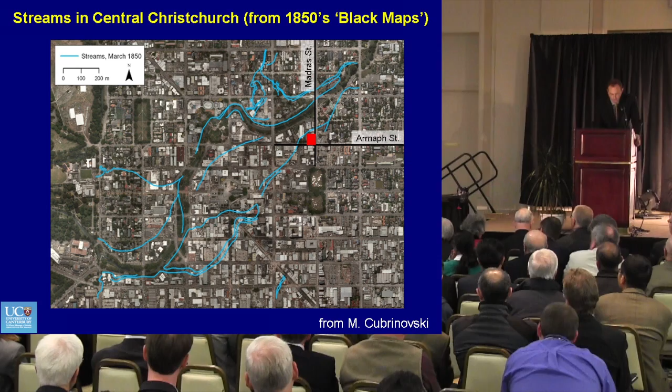If I focus in on this one area, you can see it's got a zone where there was a buried stream. And sure enough, the buried stream actually cuts the left side of that building, as shown in this picture.

With a laser level, we measured the deformation, and we saw that the north side of the building, on the right, went down 6 centimeters relative to the short building next to it that appeared to go down with the ground. So the ground and that building to the right probably went down a little bit because things liquefied in the area a bit. But that building went down 6 centimeters with respect to it.

As you went further out, you got closer to that buried stream channel that clipped the corner of the building. Over the last 2 bays, most of the settlement occurred - about 20 centimeters of settlement over the last 2 bays. That angle distortion is about 1 over 50. So the kinds of cracks we saw in the beams are to be expected.

A very important thing is look at the ejecta. That ejecta probably came out from underneath that shallow foundation supporting that column. So it's not a surprise that column moved down significantly.

We've done CPTs in this area as well as some borings to calibrate it. I'm showing in red the shallow liquefiable soils as calculated by Robertson and Wride, but I get the same answer using Idriss and Boulanger or Moss Seed et al. They all say that's going to liquefy. And then we have deeper liquefaction, shown in orange.

Across this area we had liquefaction, and these are sandy soils, so plasticity is really not an issue here, which basically led to some overall settlement. That's probably that free field settlement.

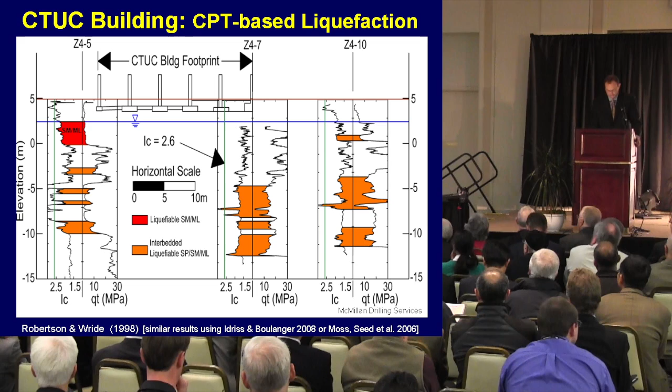What would we do? What kind of insights would we gain if we used the traditional approach of post-liquefaction reconsolidation settlements, which were meant only for the free field? Well, we capture about 10 centimeters of settlement here, mainly because of the deep liquefaction. And we capture some deep liquefaction and that shallow liquefaction here, and we say 15 centimeters.

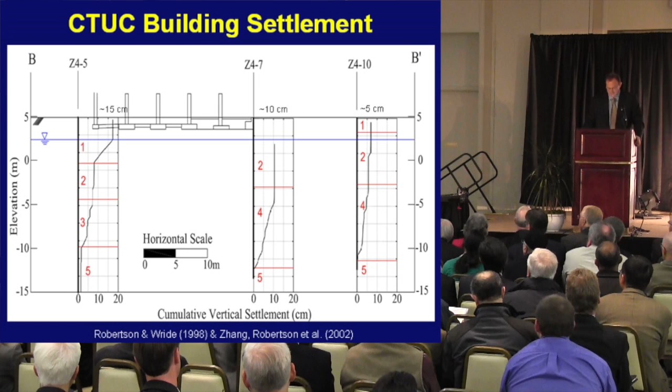There are engineers that take CPT locations, do these calculations, and use that to estimate differential settlement. They should not be doing that, because the actual settlement was 15 centimeters in that location and 40 centimeters relative to our benchmark. It can't possibly work because it only focuses on post-liquefaction volumetric strain - it's not looking at shear, and it's not looking at the effects of ejecta.

Now you say, well, what can we do? You know, I come here and tell you what not to do. I'm like your father or your mother.

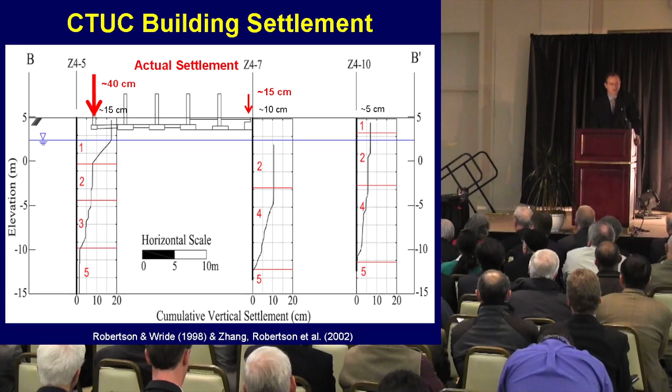First, liquefaction severely damaged the ground and the buried utilities. You've got to think about it as infrastructure. Tom O'Rourke is working on the buried utilities. The heart of the city is literally broken. 70% of the buildings in the central business district have been demolished or soon will be demolished. 70%.

Each earthquake was well recorded, so there's an opportunity to look at things like magnitude scaling factor and other aspects in terms of performance-based engineering. And like Adapazari, like I've seen in a lot of cases, it's the soil right beneath your feet that matters most. That loose, shallow, silty sand, when present, led to most of the damage I've observed in the central business district for the larger buildings.

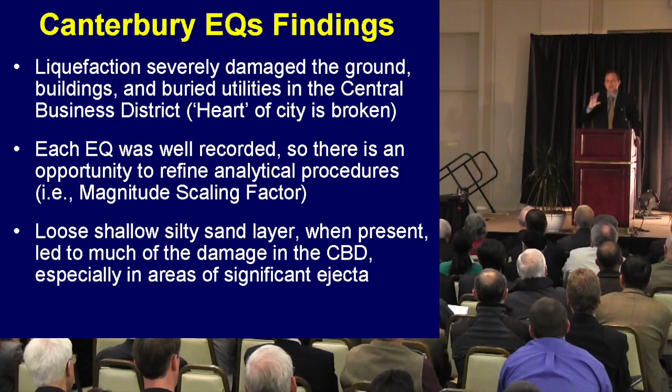I'm studying a building that we still have to get access to, but I've got the observations. We just have to add some CPTs. A 25-story building that was taken down. It had some structural damage, but it was repairable, but the entire building tilted about half a degree on a big mat. So it's not just 8-story buildings. It can be 12-story buildings. It can be 20-story buildings on a big mat.

So, recommendations, two slides. One, there's no reason not to perform cyclic testing if you've taken the care, and you should, in terms of sampling effectively, to get undisturbed samples. And then you check that by using something like the NGI criteria, and see what the response is. Call it whatever you want to call it, but say this is how the stresses and strains develop in the laboratory, this is the way the strains develop. Let's calibrate my numerical model against that. Let's calibrate my insights against that. And let's see how that system responds to that kind of behavior, whatever I call it. Because that's an engineered material response to earthquake shaking.

If you are going to use triggering techniques, realize that they were developed for sands and non-plastic silty sands. When I looked at the 1985 Seed et al. database, he only had 13 case histories where he had more than 35% fines, and those case histories were largely non-plastic fines. So why would a method developed for sands and non-plastic silts work for silty clays if it's an empirically based method? You have to use your judgment. So I'm saying a technique like Bray and Sancio, where you're looking at PI, plasticity index, and water content, can be applied conservatively, but really there's no reason not to take samples and test it.

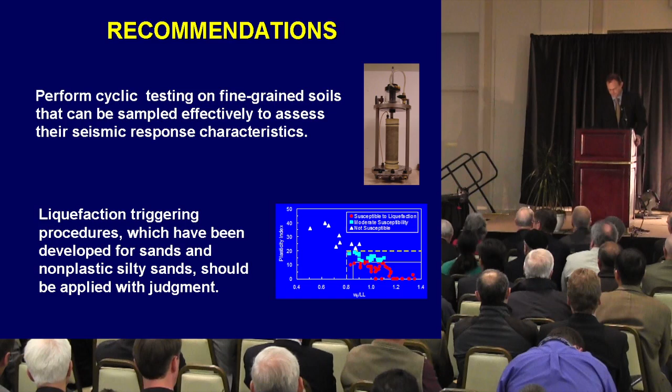In terms of the case where you have buildings on level ground with no free face, this fits into this conference—we're talking no slope, okay? If you have a slope, then lateral spreading is a big issue, and slope stability is a big issue. Whenever you get large lateral movements, you get big vertical movements, and that's a special case. In fact, you have to mitigate that issue. But you do often have cases where you're away from the riverbanks and you have level ground.

In those cases, if you have a pile foundation, very importantly, the neutral plane has to be below the liquefiable layer. Bored piles did not do well because they take load through skin friction, and when the ground liquefies, they transfer that load down to the base and you get settlement. You want to drive those piles into the ground. You not only get densification from the liquefied soil, but you're developing the neutral plane in the bearing layer. The soil, the pile, the ground's already moved down that pile, and so if it liquefies and moves down a bit, you're not going to get significant additional settlement. And that's what we see in the case histories.

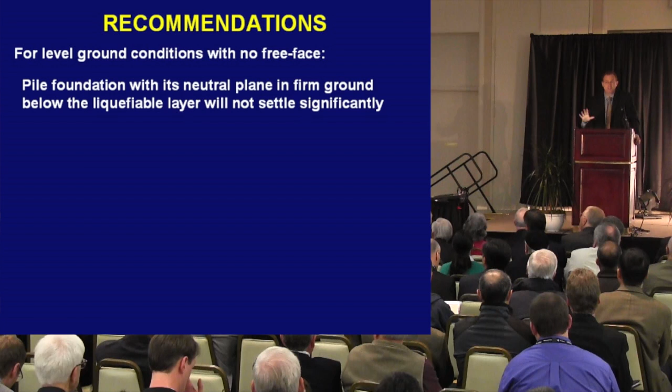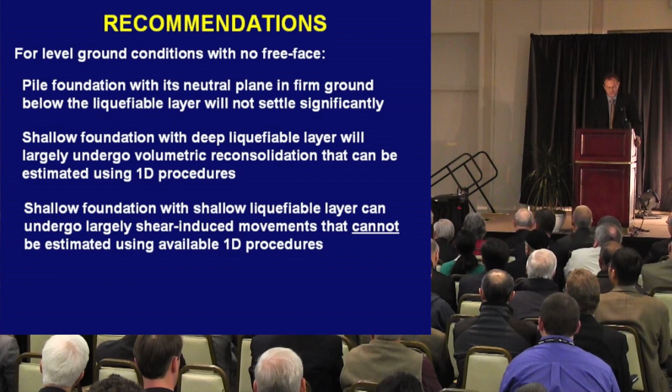So you should do effective stress analysis that's been calibrated with good earthquake and soil characterization. And if you're not going to do effective stress nonlinear analysis, it's better, in my view, to use engineering judgment and look at case histories and make an estimate than to use a technique that is clearly not appropriate. Thank you.